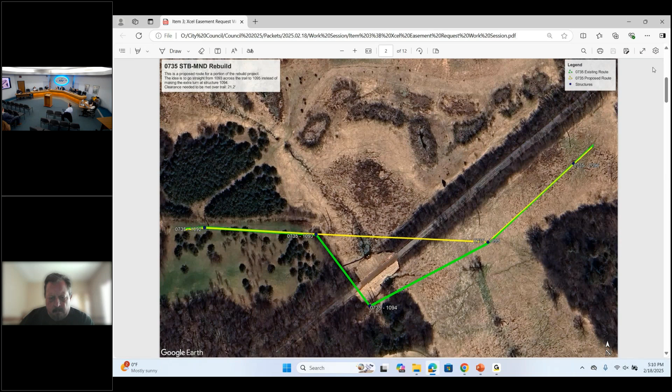Okay, next is the Woodland Cove HOA crosswalk request. Who's going to take that? I can take that.

This has been an ongoing discussion with some HOA members and residents of Woodland Cove for about the last year, covering various questions like the pedestrian activated crosswalk lights, and trimming the hedges along Kings Point Road and Woodland Cove Boulevard. We've looked at that and worked with them. One request was to add a couple of crosswalks to Woodland Cove Boulevard.

So we've looked at it internally as staff. Myself, Gary, Allison did a little research, and Paul - that's the core group that looks at some of these requests. The engineering piece does not meet the standard of adding a crosswalk, so at that level it's really up to city council if they want to do it.

I have a couple of videos, I believe, maybe a doorbell cam or something that shows the intersection. They asked - I don't know if there are representatives here - that's your camera, okay. So we can pull that up if you'd like.

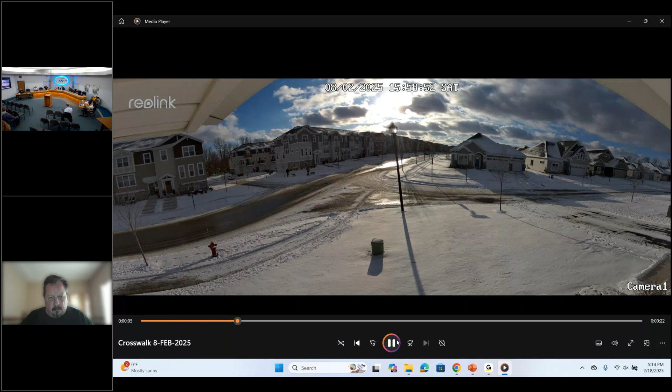They also look at sightlines - what are the sightlines at these intersections, do they meet the standards? I believe the standards are met for the sightlines at this intersection. I think for a crosswalk it's about 300 feet - is that correct? Right, correct.

So it's 300 feet, both for the pedestrians - they want to make sure pedestrians can see both directions for 300 feet, and that vehicles can see 300 feet ahead in case people are in the crosswalk or intersection. So a lot of times MnDOT and engineers will say it's not warranted because speeds aren't there, accidents aren't there yet.

And then because of the number of daily traffic counts, but I think we should also look at it in terms of whether we want to prevent something from happening. I don't think a crosswalk will prevent anything from happening. Drivers in the neighborhood aren't necessarily unaware - pedestrians frequently just walk wherever they want. We were driving on Kings Point Road and saw kids just go right through the middle of the intersection, not to the flashing pedestrian lights to push the button and make drivers aware of them.

I think a crosswalk will give pedestrians a false sense of security that cars are going to stop and that they don't need to be aware of it. I think with regard to the bus stop, you could reach out to either Minnetonka or Westonka and ask them to move the bus stop.

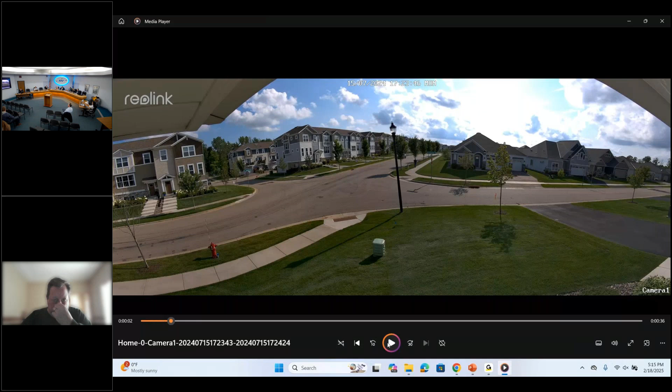One of the things I noticed in the first video, certainly the goal here is safety, but I don't think just putting in a crosswalk makes it safe. This video demonstrates that people are capable of crossing the street safely with or without a crosswalk. What I'd look at is how long folks have to wait to cross, since there are so many vehicles they have to wait a long time, that would be more indicative of a need for a crosswalk. We saw a vehicle stop coming the other way with no crosswalk. While people try to be good Samaritans, that's actually an incredibly dangerous thing to do. If you have the right of way, go. Don't stop, because you're creating a hazard by doing that, and a lot of people don't understand that.

It could be that the car was parked though. Right, it may have been, it's difficult to tell here. Those folks with the dog come up to the intersection, they wait, a single car goes by, they look, and they safely cross the road. That doesn't indicate a need for anything. That indicates this works exactly the way it was intended, from my perspective.

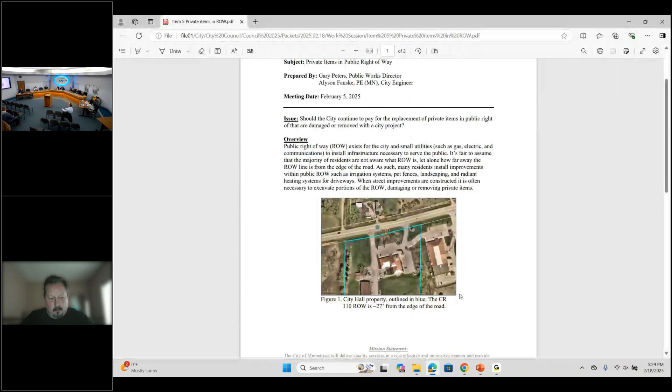It might be helpful if we could pull up that stretch of roadway and see, it's hard to know just talking about it, how far is it to the next crosswalk? Yeah, so there's an actual marked crosswalk about 300 feet to the east. Can you bring that up on Google Maps? Yeah, so there's a crosswalk, that's where we'd like people to cross, but we understand people cross at the trail too. Yeah, there's marked ones with the trail right here.

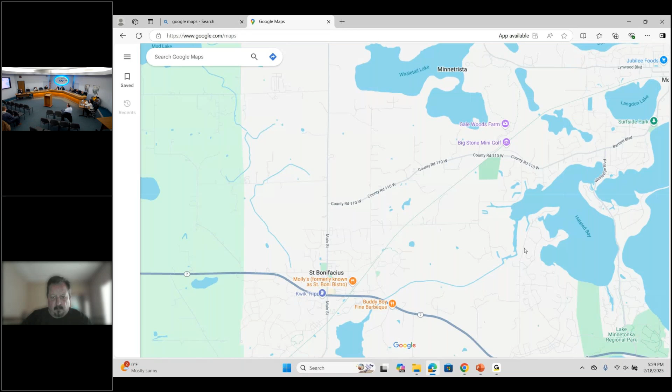But pedestrians generally cross at the closest point, and then walk on this side of the road and go down the side. But we have sidewalks leading to the crosswalk. So I understand that some people don't want to walk 300 feet to a marked crosswalk, but that's why it was designed that way.

No, that's just a trail. Jeffrey? Well, are you saying then every intersection should have a crosswalk? Because that would become so cumbersome that it would actually take away from the point of having a crosswalk. It doesn't draw awareness, it just makes it so confusing.

So the current marked crosswalk is how far from Foxglove? Right, well, which part of Foxglove? Because there's two entrances. This is the marked crosswalk right there, and then Foxglove has two entrances. Which one? There, in the park, the park is right here.

Can whoever's running the map just point out the location that you're requesting the crosswalk at? Right there, so it'd be right here. That's one of them, and then the other one is at Cranesbill. And the actual crosswalk is further to the east. Yeah, that's the crosswalk for the trail that goes across, it has nothing to do with crossing Woodland Cove or getting to the park.

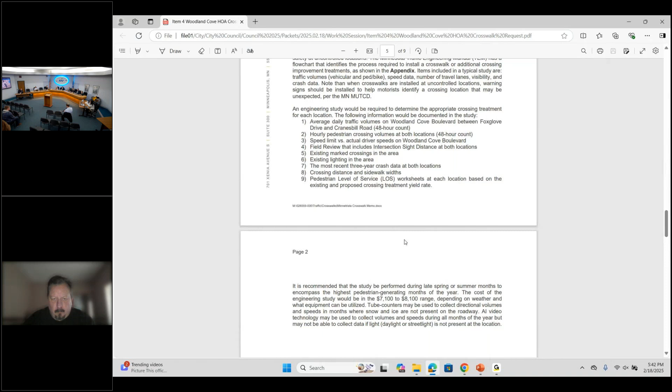You'll see in there, one of the first decisions, after the first question is no, it talks about an engineering study. So when we look at the engineering study, it does look at the volume of pedestrians going through the neighborhood, certainly the speed and the volume of traffic going through there. And then also included in that flow chart is the distance from the other crossings. So it does walk through some of the evaluation criteria when looking at crosswalks through there.

But certainly an engineering analysis is a lot more robust than what the council is looking for in this instance. I mean, I don't think we need to spend $8,000 to be told that cars are traveling faster than 30 miles an hour, or that there's people crossing here. But I think one of the things that would be good to know is...

If a crosswalk were to go in at Foxglove Drive, how far apart would be an acceptable distance? Because I think that would then limit the number of crosswalks. Is it 350 feet? Is it 700 feet? I mean, how far should they be apart? What is a reasonable and safe distance? Because you don't want them at every intersection.

I understand that. And I would, if I may, say that's up to the city council, because right now, I mean, we obviously went through an engineering evaluation of the roads and the road configuration when it was put in. It didn't warrant any crosswalks. So if city council says, oh geez, we want to have crosswalks every 300 feet, well then that's now the standard. If we follow the engineering standard, it's done.

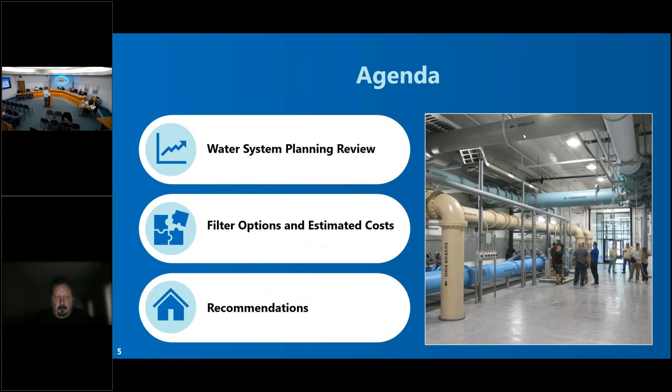So, an update I guess from last meeting. There's some questions on design size - are we designing too big of a facility? So we'll review some of the water system planning work that we've done to give you a better sense for your future demands and some of the assumptions we made. We'll talk about some of the filter options, the estimated costs we looked into, and then we have some recommendations.

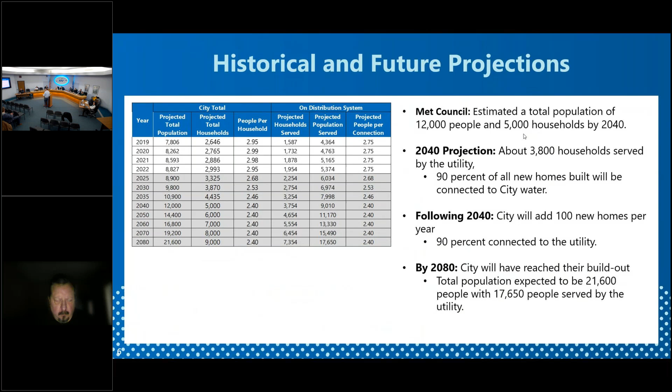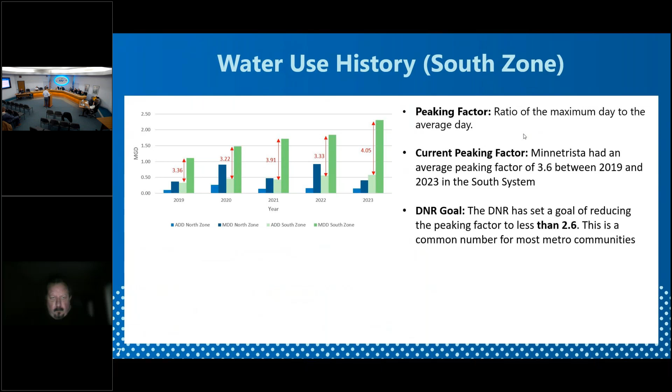For reference, the DNR, when it comes to water supply plans, typically recommends a peaking factor of 2.6, which is very common in metro communities. So you guys are about a whole point higher than most communities - I think you know that, I'm just trying to give you a sense. And that's an average, I know there's been summers where we've been even higher than that.

So we take our population projections - just looking at the south system - and we take the average gallon per capita per day times the population projections and then times the peaking factor. That gets us to our max day. So that's how we come up with what we think you're going to use on the hottest day of the summer - that's what we have to design to.

So the green is the historical, and the white is everything projected. This was from an older study, so 2024. We now know, but we projected about 1,360 gallons per minute would be the highest demand you would see. That projects all the way out into 2080.

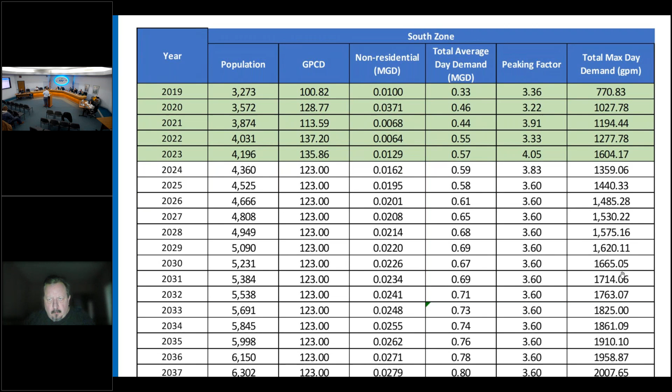So if we're looking just at the south zone, the Kings Point water plant will produce 1,000 gallons a minute, and in 2050 we would need an additional 1,700 gallons per minute to max day. So we use 2050 as the new reasonable planning target for capital infrastructure - that's why I highlighted that, because I think it's important for reasonable planning. Can't build to 2080, so 1,700 gallons per minute would get us, assuming storage is a separate issue and we had enough storage, an additional 1,700 gallons per minute.

So we want to be pumping 27, or filtering 2,700 - that's an additional 1,700 beyond the Kings Point water. That's assuming a 3.6 peak factor, and that's going out to 2050.

So you've seen this chart before, but that red line, that's the 1,700 gallons per minute - that's where it would get us to. If we would design to the 2,100 gallons per minute, that would get us to about 2060, so that's an additional 10 years.

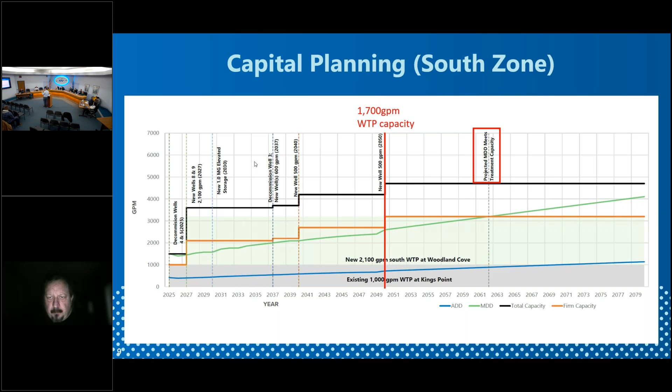Going back to the peaking factor, now if we reduce our peaking factor to 2.6, which is the DNR recommendation, that reduces the demand in 2050 by 700 gallons. So then we would only need 1,000 gallons per minute at the new Woodland Cove water plant. It's important for later discussions because I'm trying to bracket what you guys potentially might need in the future.

So if I go back to that chart, you can see that green line, the peaking factor of 3.6 - that's basically the trend you're on if you keep your current peaking factor. If we move to a 2.6 peaking factor, that pulls you down to the red. So you can see what that means for the length that this infrastructure will provide the service it needs to provide.

When reducing your peaking factor significantly down to 2.6, you get a lot more life out of the infrastructure you have - well, life, but you can service more people. You're able to, it's less investment. So I wanted to show you this to give you a perspective of how big we should build for this Woodland Cove, how optimistic we are that we can drive that peaking factor down, and how quickly we're going to grow.

So question, because we're talking peaking factors, which means irrigation - since now going forward we're talking about requiring developments to put in stormwater ponds and pumping from stormwater ponds rather than using ours, how can we factor that in? I'm not the expert, you are. Because we might be at that 2.6 going forward. Does that make sense?

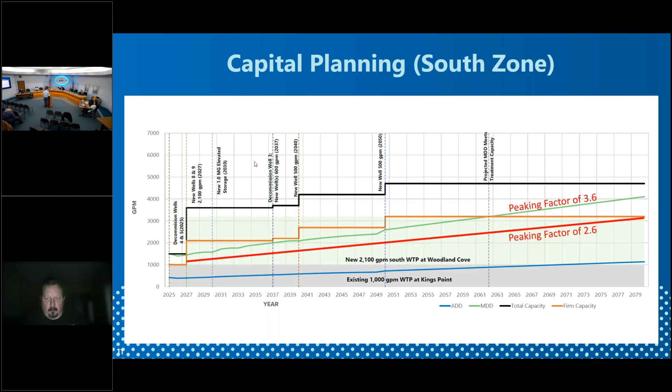So more question on the peaking factor - do we have a long-term number, is the DNR figure a long-term one? Because looking at the average rainfall for the last 5 years, it's particularly dry compared to the long-term rainfall in the Twin Cities. Yeah, and I think 2023 was particularly dry - just recent things I've been looking at, that was one of the drier years on record. So it doesn't surprise me that your peaking factor was north of 4 that year, that definitely drove up your average a little bit.

But the 2.6 that the DNR recommends is just kind of a global recommendation, it's not specific to us. So it's a target - they know you're going to be high some years, lower other years, but that's the target they want to see. Do you know what we hit last year for 2024 yet? Give me a second.

So in order to answer, climatologists with global warming and so on are anticipating not necessarily more rainfall, but more heavy events. In fact, we're already seeing that when we do our stormwater pond designs - they're already requiring different standards, it used to be every 100-year event or whatever, and now they design it differently because we get more extreme rain events. So not necessarily less rain, it's just going to change how much we get and when, if that makes sense.

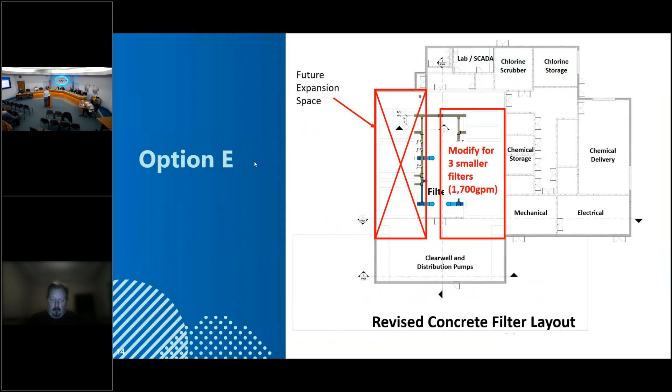If we do B, the more expensive but not the most expensive, we're good till 2040, so we won't need to add any storage and storage discussions until 2037, 2038 to get it online in 2040.

Like rehabbing the other water tower, removing a water tower, and the 2 wells that we're drilling and engineering. This doesn't include engineering. This is extra, just the bid. It's not bad, this is like 30 million upside.

So I guess just to kind of go over some details. Option B is also a larger chlorine system, so we could reduce the chlorine system and remove it. The clear well reduction is about 400,000, so that 23.2 is really 22.8. So if we go to 600...

If you go to, yeah, you're stuck with the 6. But all options are with the 600 - well, not all, but do we need the larger chlorine system with the 750? The building of the 750,000 gallon clear well does not really get you anything unless you build additional treatment capacity.

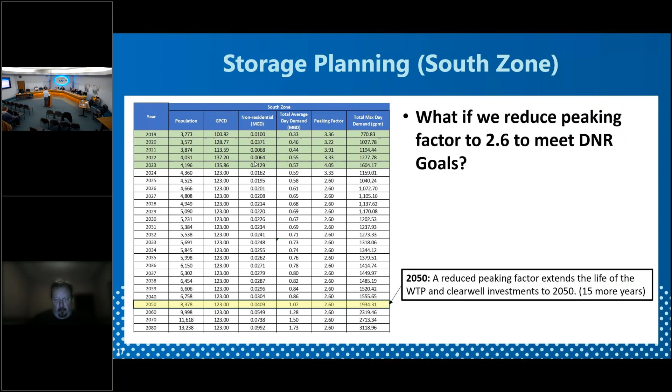So if we grow at 100 homes a year, that could go down. We'd have to factor that in, but that's just a snapshot in time of right now. And we based that on the revenue we've been generating, increasing the connection fees, so we'll have to talk about that, but there's just ways of, I'm just saying, so we know.

So Jasper, we were chatting today, it's like $700 a household more for the units. So we have about 2,200 accounts, and let's just use a round number of $22 million because it's easy, 'cause it's $10,000 per account over 20 years plus interest. So take that into account.

It's basically $500 to $700, probably $700 a year, for 20 years, and that's in addition to what they're paying right now.

All right, so we need to wrap this up. Brian, where are you at? I know you're really good at digging into this stuff.

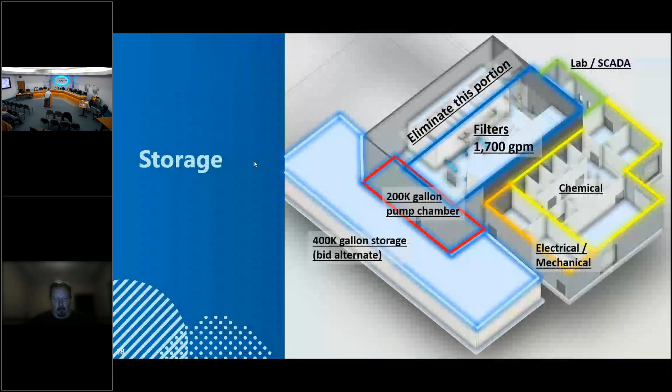So what we talked about now was basically between B and D, is that basically 1,700 with 600 storage or 2,100 with 750 storage. Both options would still have the smaller cylinders for chlorine. So B would be 22.2 million if you do the smaller chlorine, and D would be 21.8.

So you're basically getting another 150,000 in the clear well for about $400,000, which gets us for sure out to 2050. Maybe longer if we get our peaking factor down.

The spreadsheet with all the peaking factors, is that a workable document where you can put in like 3.4 and 3.6, send it to Jasper, and he can forward it so we can all play around with numbers? Absolutely, thank you.

I think he's looking for some direction tonight. So, what was Brian? What's the question again? B or D? Pick a letter. B, D, or E. I would say E is an option too.

It's at 1.7, you just have to be okay with future conversations about potential water system expansion. Just be aware of it. If we do build a lot more houses, or maybe we're at 100 or more, then that time will come sooner than later for that additional storage. So just be prepared for that conversation if you go with an E.

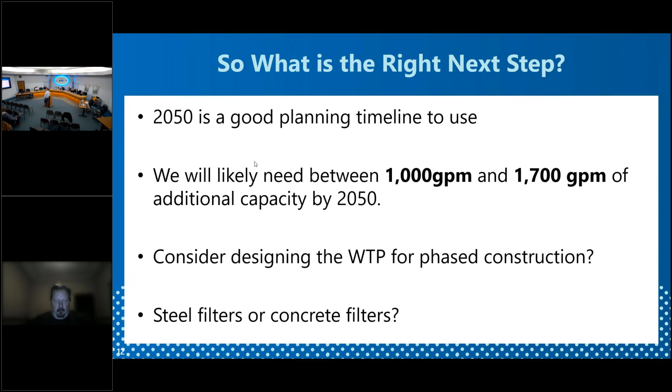I think you're right. So the 750, we have to do the 750 to get us to 2040. And then if we get our peaking factor down, we can push it to 2050, which would be another 10 years, which would be awesome. Because then we wouldn't need to discuss that till 2046. And that's kind of where I'm at. Does that make sense, with whatever the 2040?

Yeah, that's B, and that's the 23 million. Yeah, the 22 point something, it'd be 22.2 if we go to the smaller chlorine system and more storage. 22.2: larger clear well, larger treatment capacity, small chlorine, gets you as far as you can on storage and treatment.

I should ask this question already in the first slide, but does the Metro Council estimates jive with your guys' experience? Well, that's a whole different conversation. They've really, for their 2050 plan, reduced our rate of growth, but they've done that to the whole metro area as a whole. That rate of growth is decreasing, is what they're projecting. Now they're projecting that we're only going to build 35 houses, as you get closer to 2050.

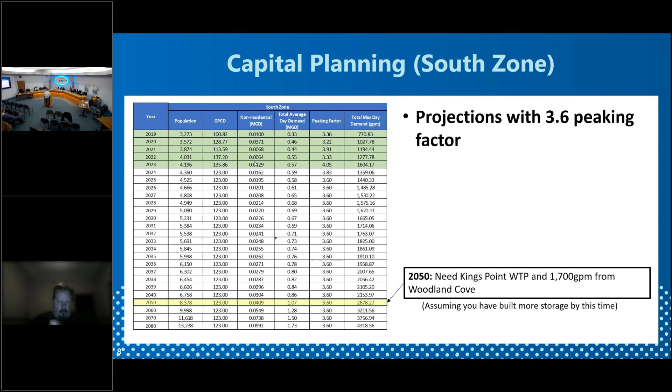I don't know, maybe they know something we don't know, but we have available land, we have infrastructure. I don't think we're going to get down to 35. That was more like, and David can fill in, that's like post-2009, 2010 times. But they're saying that's going to be the existing, basically from 30 to 50.

So the short of it is that you feel like the Metro Council has a conservative estimate that we make? I would say their current projected Imagine 2050 plan, yes, I would say that. Because it's 35 houses, on average between 2030 and 2050, 35 houses a year. What are the 2040 plans? It had us at 14,400 for 2040.

So they've really taken a step back, and we've asked them, but they haven't given us a clear answer. But they're increasing our density requirements. So things aren't jiving. You can put more codes, but that makes me feel a little better, their estimates are overly conservative. Well, their estimate has come down significantly for us.

Let me ask you this, Aaron. If we go out for bid with the 750 storage capacity and 2,100 filtering capacity, and it comes back way high, what would it take to reduce it back to the 1,700 and 600? What would it cost to scale it back? You kind of have half of it re-engineered right now, don't you? We've sketched out different options and estimated based on that, but we essentially have to redesign the filters and the clearwell, because I'm worried if this comes in at 28 instead of 22.2 or 23, what are we gonna do? What is it gonna cost to redraw it? It's gonna cost us another $1 million just to redraw it. So that's the other consideration.

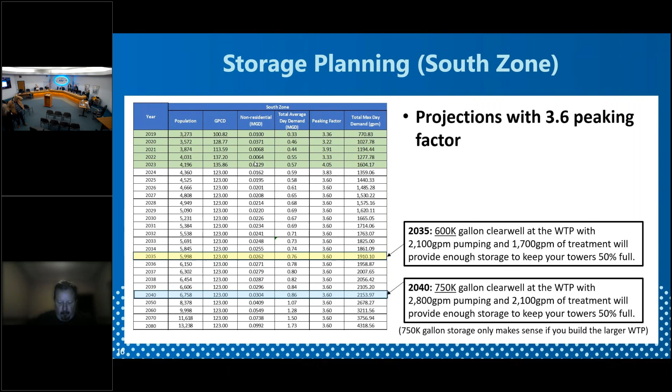The farm winery — a neighbor wants to get married there, and as you can imagine it's caused a stir amongst the neighborhood, because she did the right thing and tried to reach out to everyone and say, my daughter wants to get married there.